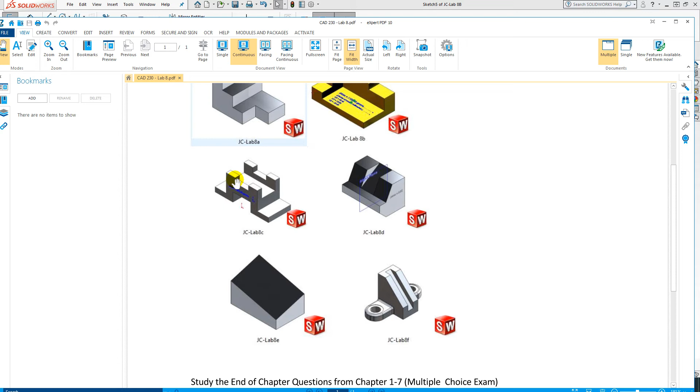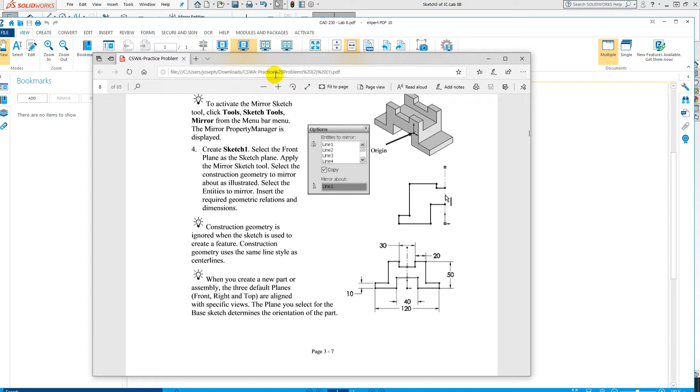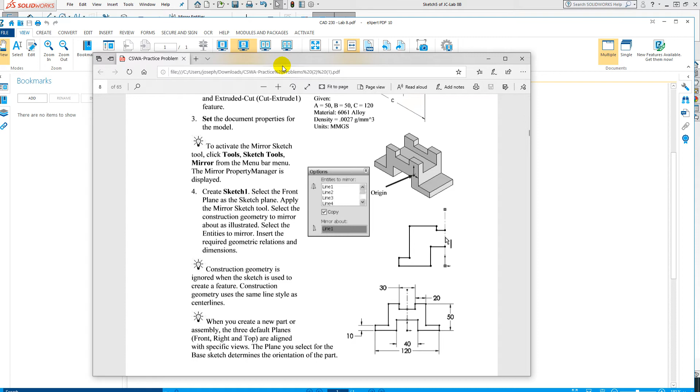So let's get started. We'll go to SolidWorks and say File, New, Part. Plain white. Options, Document Properties, Units, Millimeters. Okay.

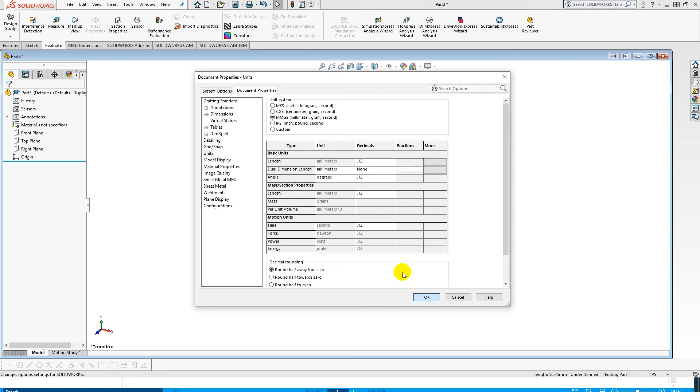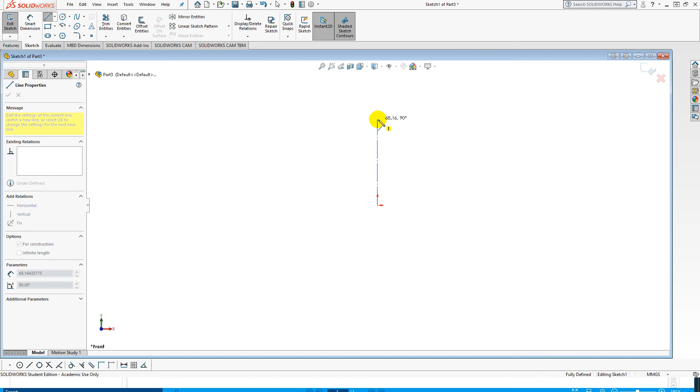We'll start off on the front view. I'm going to right click on that, start a sketch. I'm going to start off with a center line, bring that up, hit escape, and then draw this geometry like this. So we'll get the line command, and we'll say from here.

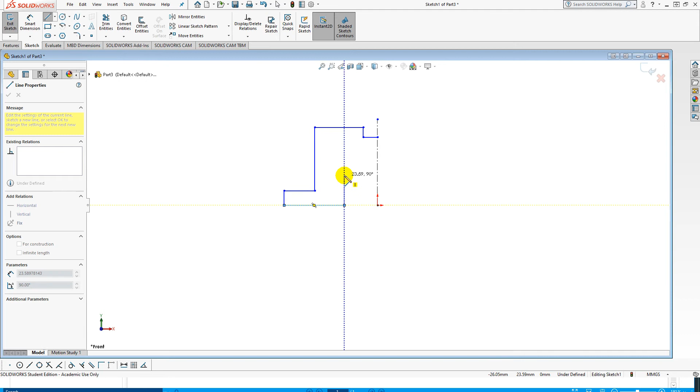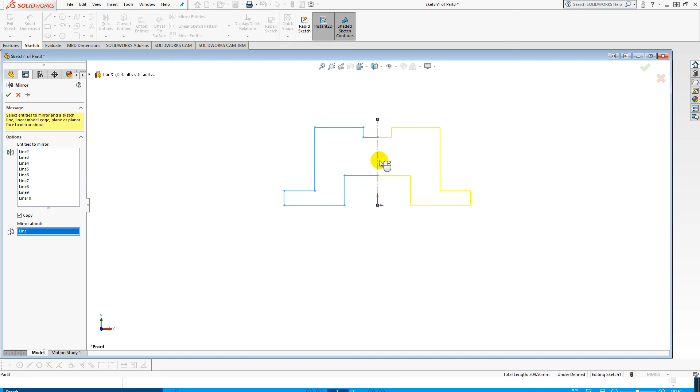Then we'll take that geometry and mirror it about the center line. And then we'll put our smart dimensions on it. So we'll put these dimensions.

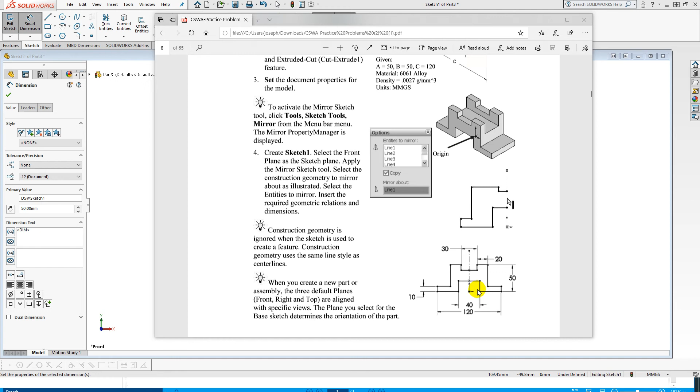So we've got all these dimensions here. We're going to need to get the depth and the height for those two components. We'll put a 30 by 20, and it looks like we'll have to get them from here. Yeah, so we're going to go 20 and 10.

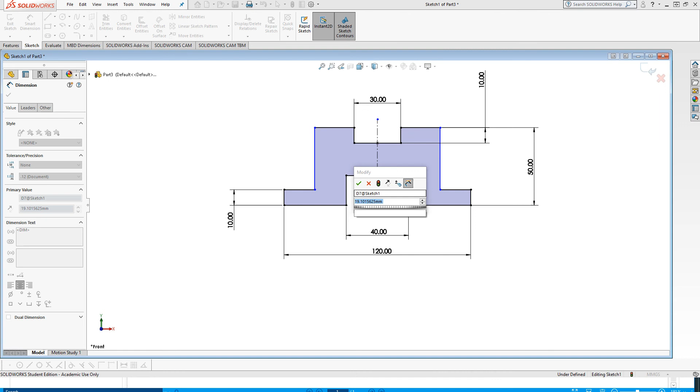So there we have our sketch. Everything is fully defined. So what we'll do now is extrude that: Features, Extrude Boss Base.

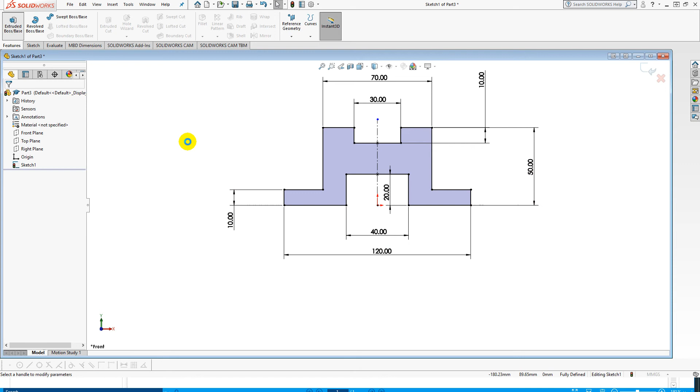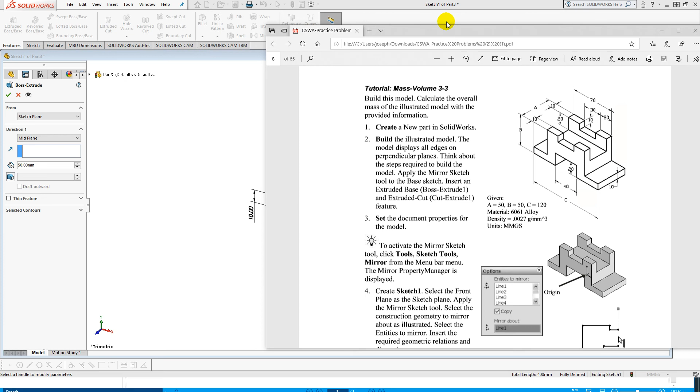As we do this, we'll do it mid-plane, and it'll keep everything centered about the middle of the part. That part is going to be 50 millimeters, as you can see, this is the 20 and the 10. Everything else was pretty much what we needed.

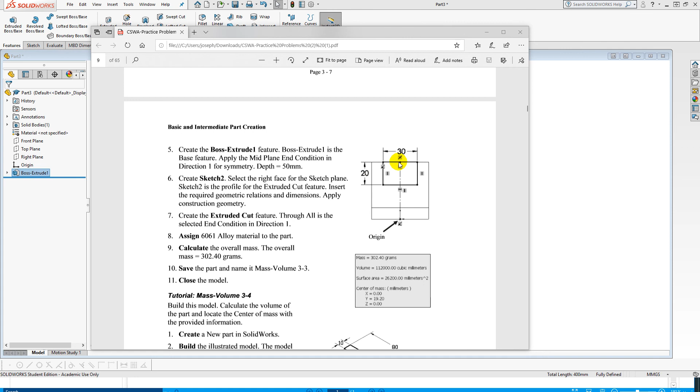Okay, so now what we're going to do is this little cutout right over here. We're going to make a sketch 20 millimeters by 30 millimeters on the right hand side. Start a sketch right there. Spacebar, normal to. And then we can draw a center line.

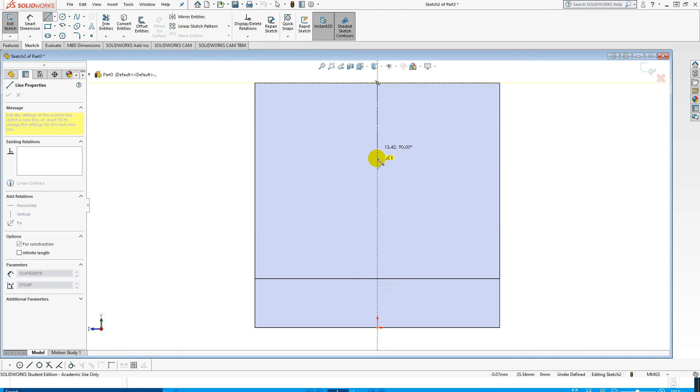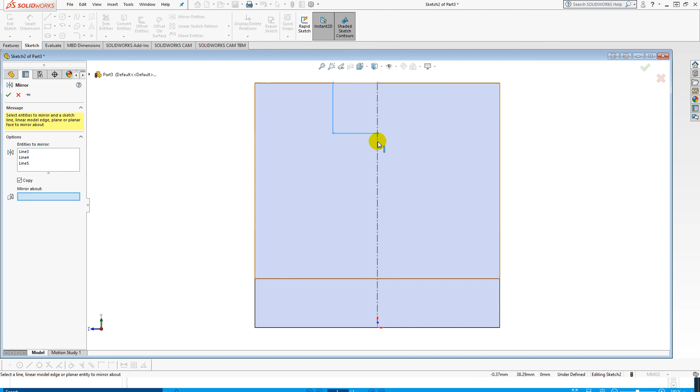If we wake up the midpoint, we can drag that down to the origin. Hit escape. Then we can draw half a rectangle and mirror it, which will keep everything symmetrical. Hit escape, mirror, mirror about, green check mark, and then we're going to extrude cut that all the way through after we put our dimensions on it.

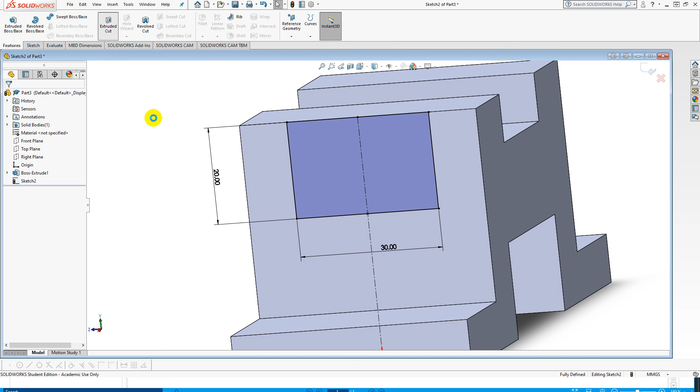So we're going to go smart dimension, that's going to be 30 millimeters. Toggle over to features, extrude cut, and it's set at blind, which just means a measurement. So we'll say through all. Okay, that.

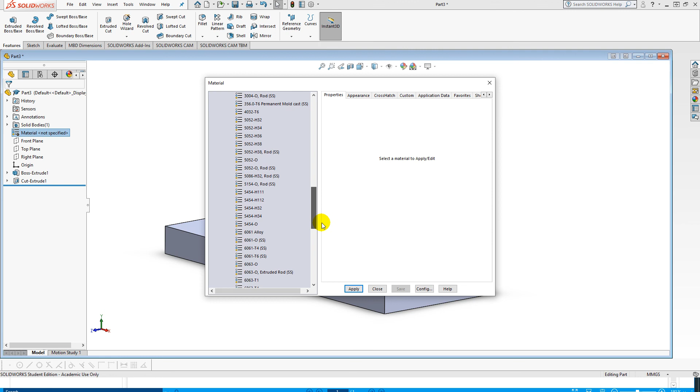Then we'll assign our alloy material, which was 6061, which is an aluminum. So I'll right click on material, edit material, aluminum alloys. Here's our 6061 alloy. We'll apply that, close it.

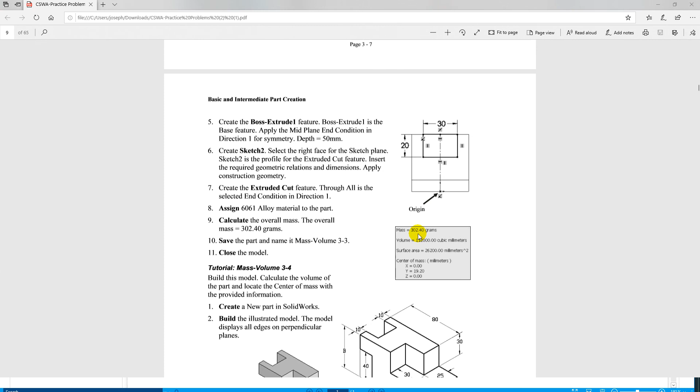We'll go to evaluate, mass property, and then we'll get our mass at 302 grams, and we'll check that. 302, so we're good. All right. We're going to save this as Lab 8C, and that completes this exercise.